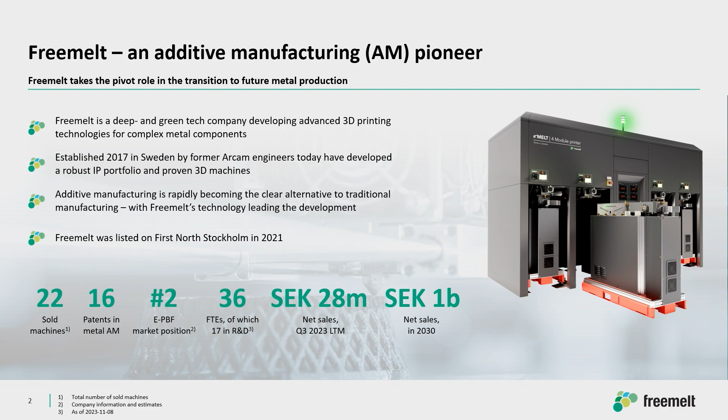During the past 12 months, we have had net sales of 28 million, and we have an ambition to be a market leader. At this moment, GE is the market leader, who made the acquisition of Arcam. But we would like to take over that market position by 2030, and at that time we should have a business turnover of roughly 1 billion SEK.

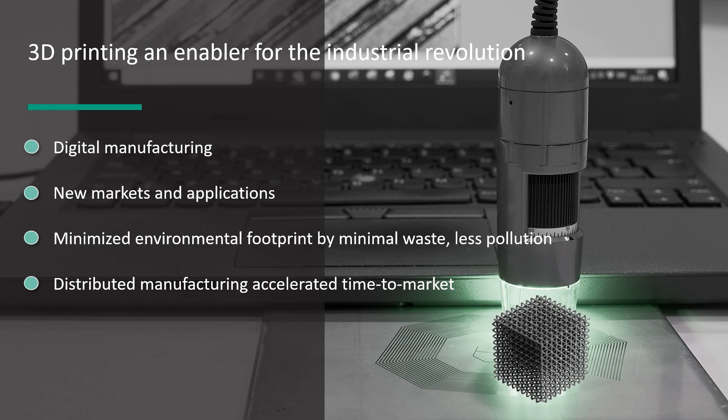So what is 3D printing? In a nutshell, it's the opposite of metal cutting or machining of metals. Instead of having a big piece of metal that you machine down to the end application, like in this case an orthopedic implant, you put powder into the printer, and layer by layer you build the application in one process. You import a digital file, a CAD drawing, into the machine, and then it automatically starts to print. So it's really true digital manufacturing as well.

Another benefit of 3D printing is that you can build and design the product specifically for the application. One key benefit is that you can also put in different kinds of material structures and properties suitable for the application. Take this hip cup implant - it's titanium, and you can build it from a structure point of view that's good for bone ingrowth into the implant, but also make it lighter, of course, if you put it into the body, and still strong. So that's also a key benefit.

The other part is that you can also move your manufacturing footprint. Instead of having it in different parts of the process, from the metal cutting in one part of the world, and then shipping it around, you can actually put the manufacturing closer to the end user, which brings a lot of benefits. This is also really driving or enabling a big part of the green industrial transformation that is happening.

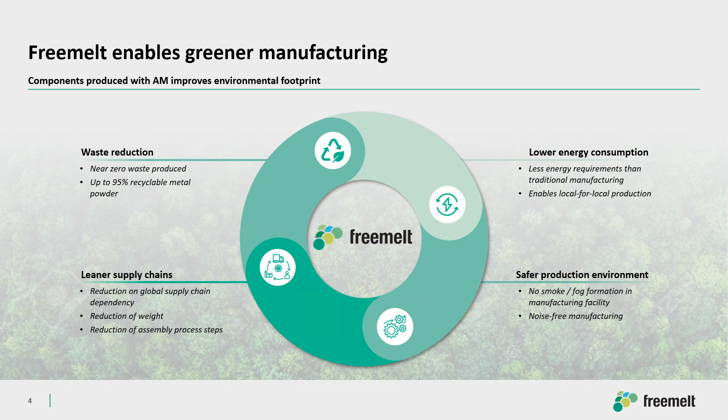There are different kinds of technologies in 3D printing, and as I said, we are in powder bed fusion, which, when it comes to metal applications, represents more than 60% of everything that is manufactured. The laser part is one of the energy sources - this has been in place for more than 20 years. We work with electron beam, which is another kind of niche energy source.

The main difference - at this moment the focus in the industry is going from prototyping. You've had a lot of prototype focus in the past, now we start to go into mass production. It has taken a lot of years to get to this. But here we definitely have a benefit with our technology, because an electron beam, for instance, you can move pretty much 4 kilometers per second - an extremely high speed.

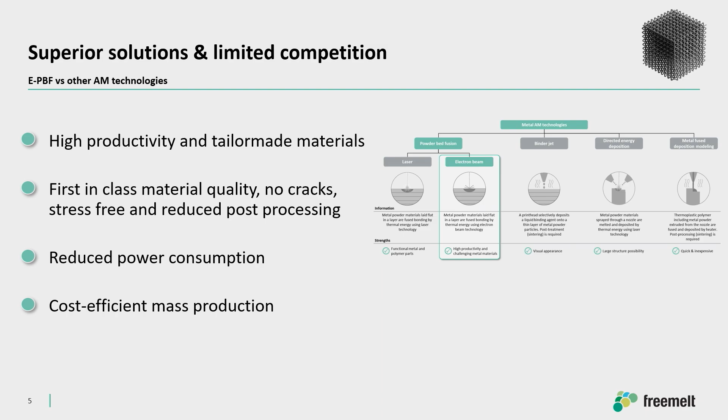The other part, which is important as well when talking about material properties, is that you can also manufacture in high temperatures. We have a vacuum chamber, which means you can print between 700 up to 1400 degrees Celsius, which makes the properties in the product much stronger and better than otherwise. So from that point of view, we're really well positioned when stepping into the mass production opportunities.

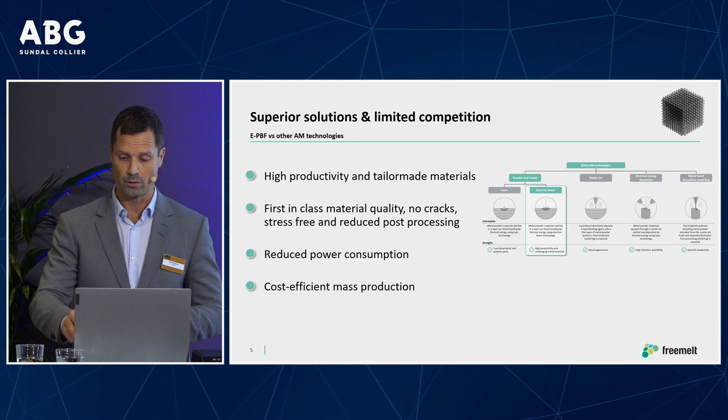And this is important to say as well - these are applications that are printed today. So of course you have a huge untapped opportunity as well. If I take, again, the hip cup or the implants, only 4% of all the implants at this moment are printed. So it's just a huge organic growth opportunity for these products as well.

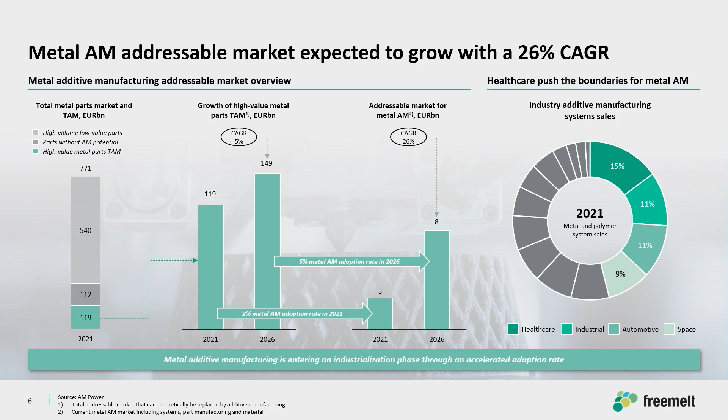Freemelt, we focus on 3 materials. We have 4 focus areas. The first one is research - I think that was also one of the reasons why this company was founded, because there's a competence gap in the industry. More people need to be aware of the opportunities with additive manufacturing.

Personally, I think I'm quite disappointed in the development during the 30 years so far, but it's mainly a competence gap. This is why we try to target the universities and research institutes, really to get the knowledge about additive out there. And of course, we'd like to steer them towards electron beam powder bed fusion that we work with, so a design engineer really starts to think about how to design products from an additive point of view, and also how you structure the factory from an additive manufacturing point of view.

That's a key focus for us, and you can see here as well that AM Power estimates it will be roughly 700 machines sold by 2026. And we have a very good position at this stage.

Tungsten has the highest melting point in the periodic system. To melt this product, you need to go up to more than 3,400 degrees, which makes it really difficult to machine and work with this kind of material. That's why it hasn't really been focused on before, but now we've proved that you can get full density in the material, and suddenly it opens up a lot of new potential applications.

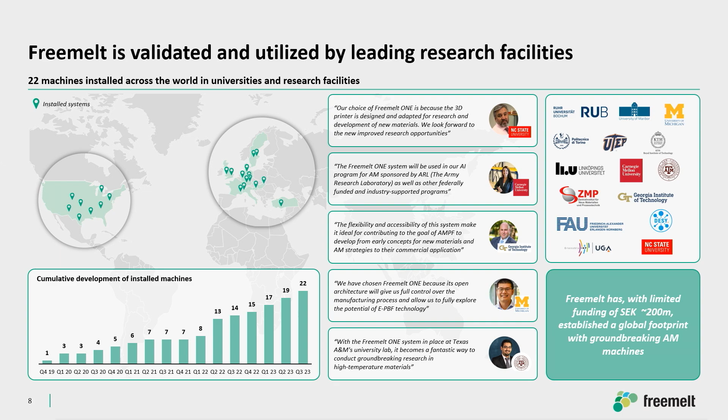In the US there is a program called America Makes. The purpose of that program is that the US is trying to take back a lot of the manufacturing industry that was outsourced in the 90s and 2000s to low-cost countries, a lot to China. To be able to compete with low-cost countries, you need to be more innovative—you need a different type of manufacturing, because otherwise your cost will be too high.

So America Makes is pretty much about industrializing 3D printing. The Department of Defense, Department of Energy, and so forth have given this program the task to industrialize 3D printing in the US for US industry. So we see a lot of focus—defense, energy, semiconductor—all focus areas at this moment.

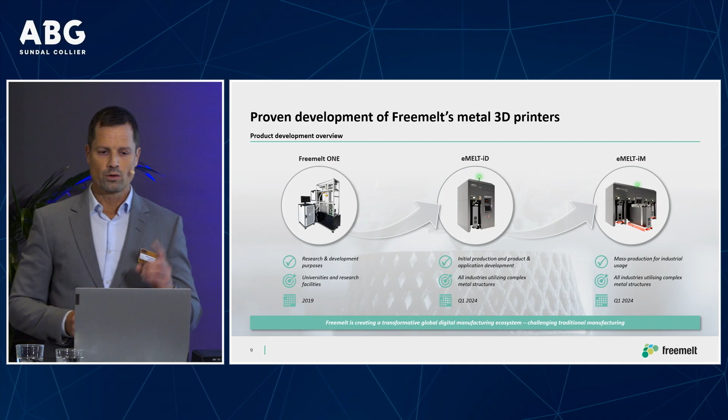The good thing with these customers is that they have tested our product now for quite a few years. Now when we step into the industrial segment, we've taken all their feedback into consideration as well. So good beta testing, if you call it that, for quite a few years.

Because we use the same core technology for our industrial offering or machines as well. So the first one is Freemelt 1. This is really an open research machine, a very transactional business for us, not too much aftermarket and recurring revenue on that one. The next machine we have commercialized, or in the phase of putting into the market, is eMELT-iD, and we have a one build chamber machine.

So this is for your application development. First you develop your material process, you secure that the material properties are as you want to have them. Then you need to define this application, and then you need to start to mass produce, which is the third machine, the IM. So iD is for development, IM is for manufacturing or mass production.

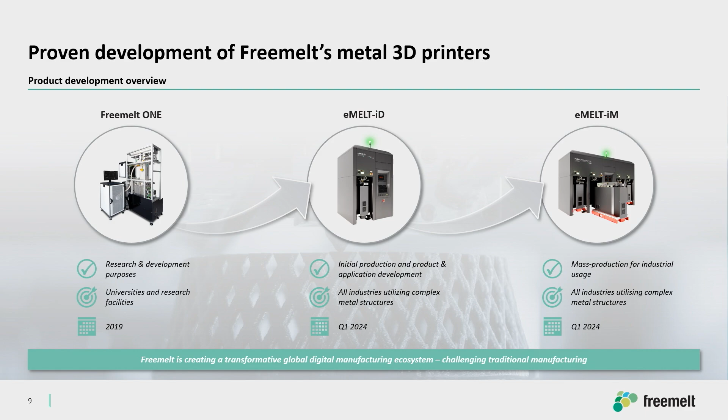And what you see here is actually something unique. I dwelled a bit about the poor development of 3D printing during the 30 years. I would say it hasn't happened too much from a development perspective. Most of the machines look the same, and the problem is that the machines are designed so that you have to work at the machine prior to the print.

So you do all your preparations at the machine. What happens then? You block it for production. Then after the print, you need to stand at the machine and do all the post work there as well, which means you block the machine from production. So we have rethought the whole concept.

So we have a modular build. We have modular build stations that are independent, which means you have 4 per machine. So you have 4 units in a specific area for powder handling in your factory. You prepare them during the build here, and when these build units are done, you pick them out and swap in the new ones.

So you do all the pre and post work in some other space of the factory. So this is totally unique.

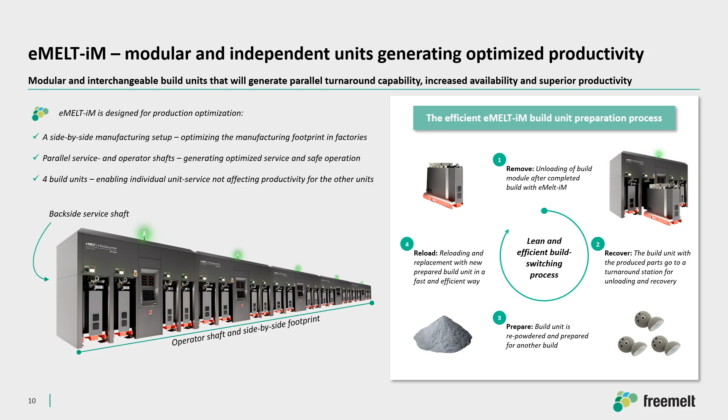The other part that is also a big hassle is that we talk extreme temperatures here, and in all the other machines with big build chambers, it takes 6, 8, maybe 24 hours to cool it down before you can take it out. So the machine is just standing there, not able to produce. Here we have active cooling during the build, which means that within less than 30 minutes you can take them out. So really the key here is to increase the availability for productivity.

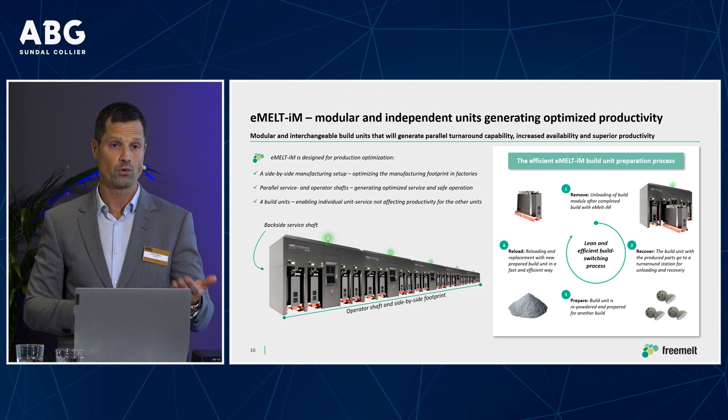Over the years, we took the decision to work closely with industrial partners to really make sure that we develop a concept and a machine that will also bring down the total cost of ownership for specific applications that we target.

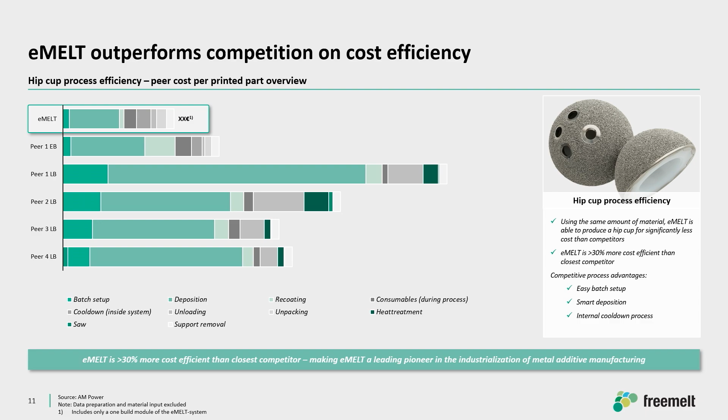And this is one example. This is the one build module that compares to all the other peers in the industry. And here, we are at least 30% more efficient than the closest competitor as well. And if you add up to the 4 build chamber, of course, the efficiency is even higher. So we have a fairly good confidence now when we go to market with this.

If we look into where we are at the moment, we're just now in the commercialization phase. So as a company, we're moving a lot from technology focus into a commercial focus. And from the research side, we will continue to focus on research and get more machines out there as well. But the key thing here now is the industrial segment for us, where from Q1 next year we can deliver machines to our customers.

And the industrial segment will be much more a performance type of pricing and business model rather than the transactional business models that we have for the research machines. So much more focus on services and, of course, the recurring revenue from the aftermarket side as well. So if I would just wrap this up, at this moment the industry is just at the tipping point from prototype focus to mass production. Technology-wise, we have a really suitable technology to take a good position here because it's really about productivity.

This will be an important part for us as a company to take the next step towards profitability as well. So thank you, thanks a lot for that, Daniel.

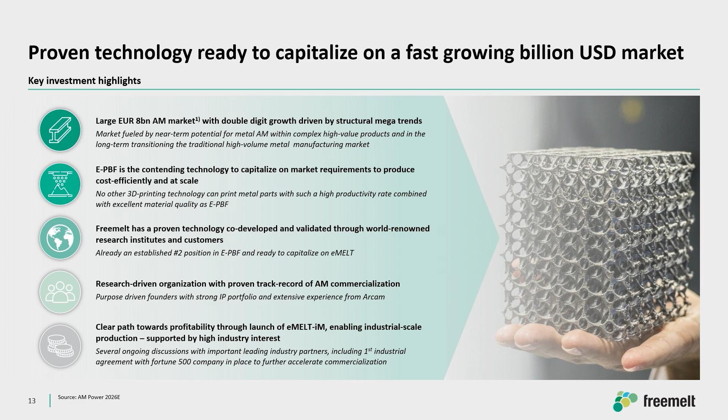Let's move on to some questions.

So you mentioned that sales so far of the Freemelt 1 have mainly been one-time transactions where you just sell a machine for X amount of crowns. Could you talk a bit about how your business model is going to develop now, partly with regards to Freemelt 1, but also looking at eMelt? Yeah, sure. I think when it comes to Freemelt 1, as I said, it's really a transaction. You sell one machine, and then that's pretty much it. Not too much of aftermarket.

Here we would even like to go to more universities, get it out even more. So I think we will maybe change the business model, perhaps more from a leasing perspective, more renting, or even get a lighter kind of product with a lower price as well. But on the industrial side, that machine, we will have more of a performance-based kind of pricing, really trying to gain trust and confidence with customers that we can deliver the total value the customer expects from the machine. So I'd say we'll go in two different directions from a business model perspective, and maybe in the future we don't sell the machine, we sell more commitment on volumes that the customer can print for certain applications.

All right, very interesting. Now eMelt is almost getting ready for its first sale, beginning of next year, hopefully. Could you talk a bit about what we can expect in 2024? It's very hard for us to know, from our point of view, what's going to happen, how fast you'll be able to get these products to customers, what will take longer versus what can happen in 2024.